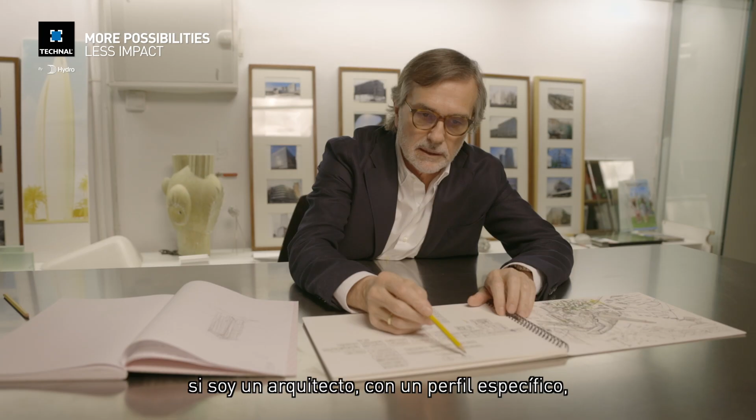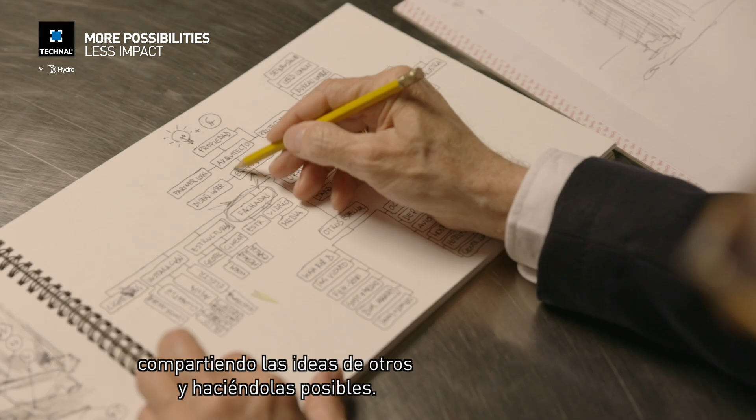I'm an architect, but with a special profile, because my team and I have developed more than 180 buildings over the last 30 years, making possible the ideas from others, sharing them by teaching in different universities, and especially through drawing. We have a small and very dynamic office based in Barcelona, from where we offer facade consultancy for the best architects around the world, including Pritzker Prize winners.

Usually architects imagine the result and engineers create the process—architects think what, and engineers know how. So we, as facade consultants, move in an equidistant position between both, and our projects are developed with a simple philosophy: technique and form are the same.

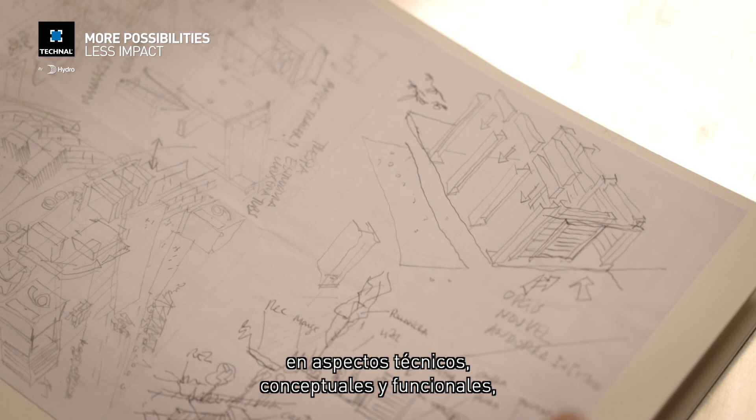Every day, more architecture studios focus their work on the level of definition of the facade, the technical aspect, and the conceptual and functional development, leaving the detailing and specific elements of the facade to be delegated to technical specialists from the industry. So the most common way to face this technology problem is to claim the support of brands that help us develop the most ambitious projects.

Our role as consultant, in addition to the above, is to think and advise from the strategic development.

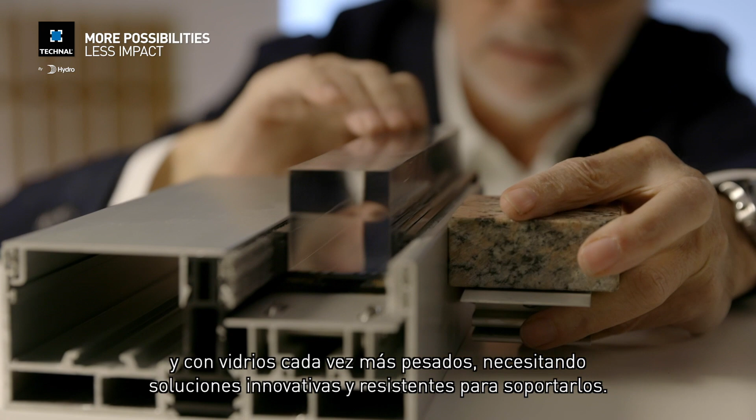The present leads us to consider energy as one of the engines of evolution, and this has been the case for decades. However, this contrasts with the need to work with large formats and glazed surfaces that push the window-wall ratio up, where the energy performance of the facade is in contradiction with the dimension of the transparent areas of the buildings. On the other hand, this need to increase sizes requires larger panel dimensions, engineered for bigger and heavier glass panels, through innovative connections and reinforced glazing support.

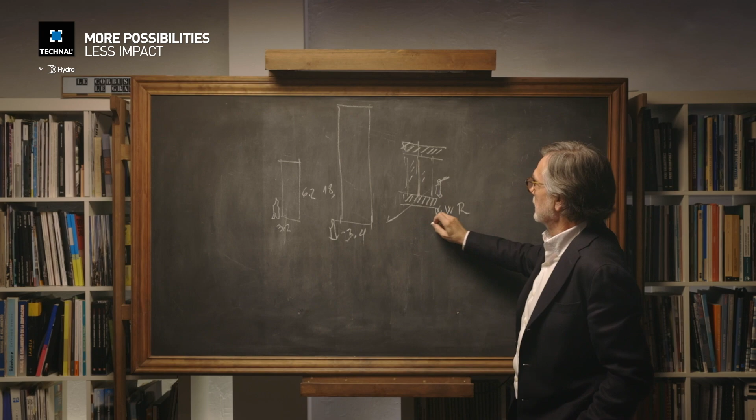Last year, we started with jumbo glass of 3.2 by 6.2 meters. Now, with different suppliers, we have glasses up to 18 meters in height by 3.4 meters. So, obviously, we can use these sizes of glass. The trend of buildings around the world is to increase the glass surface, but balanced with the window-wall ratio.

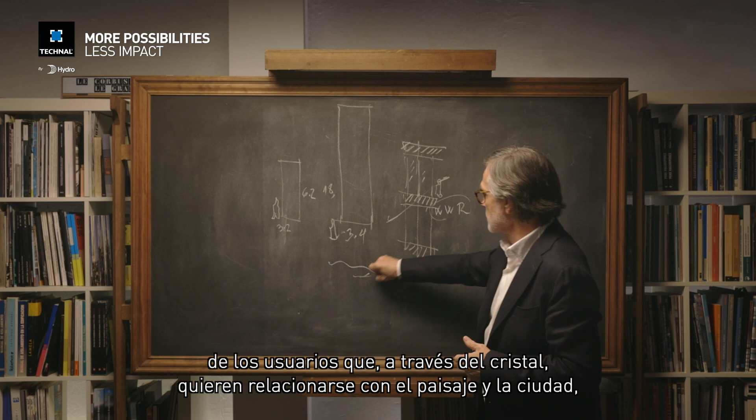Because we need to balance the comfort of users contacting directly, across the glass, with the landscape, the sea, the rest of the city, in order to respect the rules and regulations in terms of energy savings.

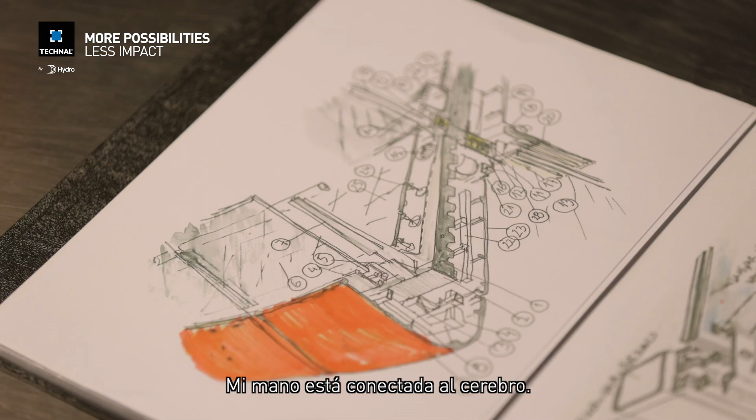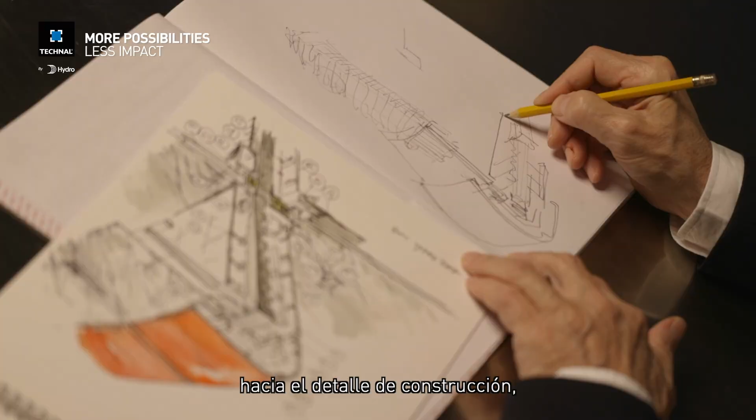The only way that I can explain my experience, my thought, my feeling about the technical decisions and technical elements, is drawing. My brain is connected with my hand directly. When we are creating, we have to pass from the concept and schematic design development to construction documents, trying to be proactive with the architects—usually our clients—in order to achieve maximal fidelity to the original idea.

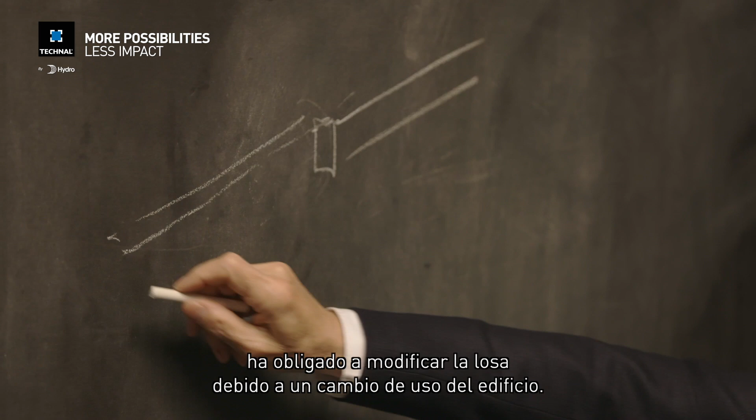For example, a building under construction in Barcelona, named Diagonal Zero. It's a multi-story building, I think 27 levels, with a special balcony. This is the original slab, because it's a huge modification of the building. This is the slab, and this is the beam that we have to support.

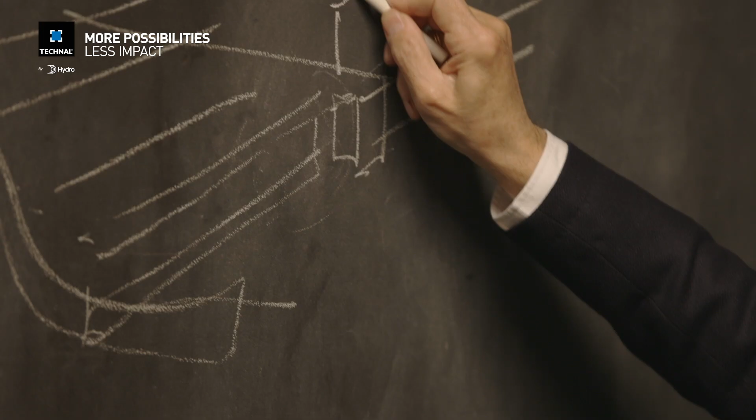This is the level of the interior floor, this is the exterior floor, and we have a shape like this. This is a balcony, this is a terrace. The building is something like this—more or less 110 meters—and all these balconies are here.

And here, in the lateral facade, we have a typical curtain wall—a profile typical with spandrel and glass and windows, etc. The pass from here to here is very important to understand what happened: what is the slab, what is the structure, what is the weather line.

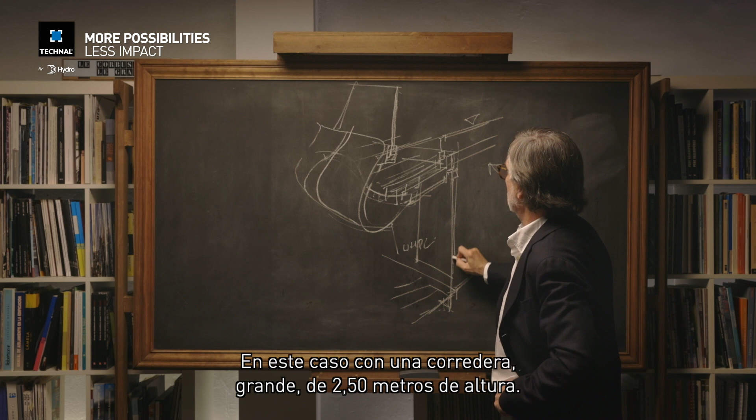In this case, with a sliding corridor, a sliding window, a huge—maybe 2.50 meters in height—and this is a part. We'd like to show this in color, but I think it's clear in order to understand what happens when we have to develop from the concept to the detail.

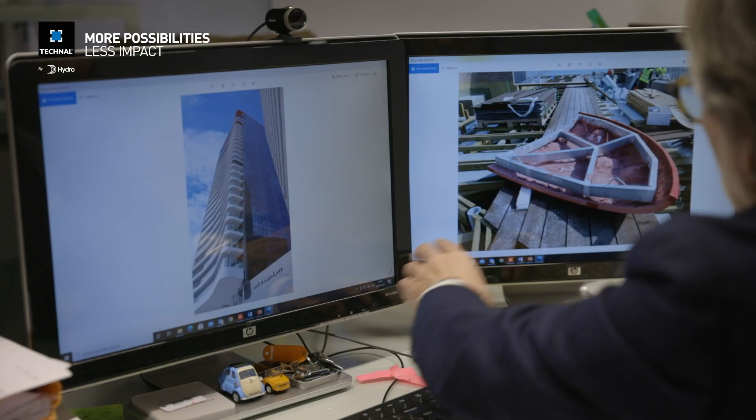The second case I would like to share with you is a commercial and residential building in Ibiza, named Isla Blanca. The author is l'agence Moatti-Rivière de Paris. The project is led by Alain Moatti, and the local partner is Josep Ferrer Llaneras.

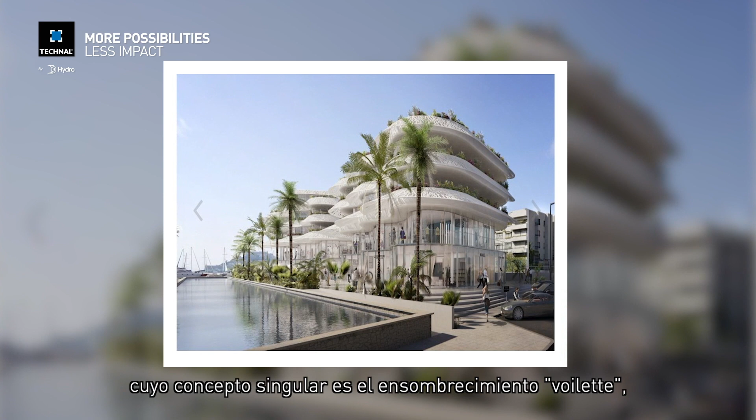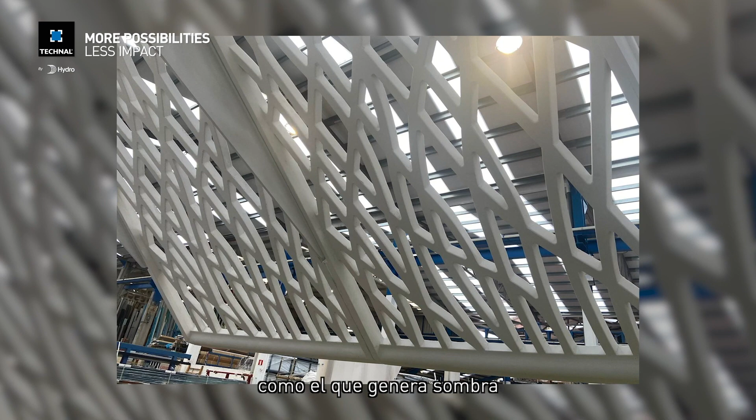The main concept is a shadow device named 'voilette' in French—an element 'qui vole.' The building is doubled like this, maybe 80 meters in length from here to here, using this kind of material like a hat that produces shadow, like the shade on the face of a woman on the beach. This element is something like this.

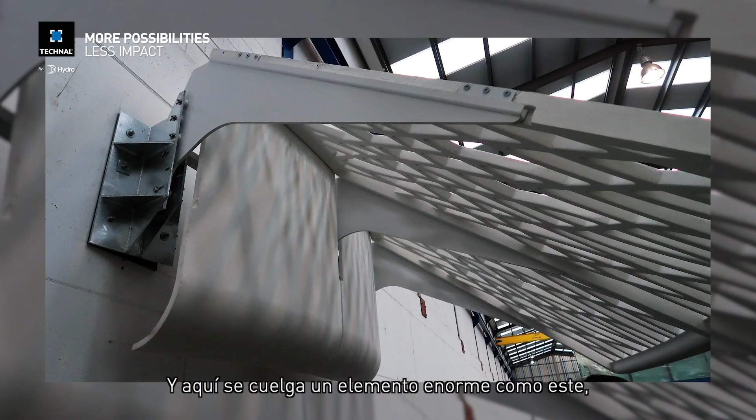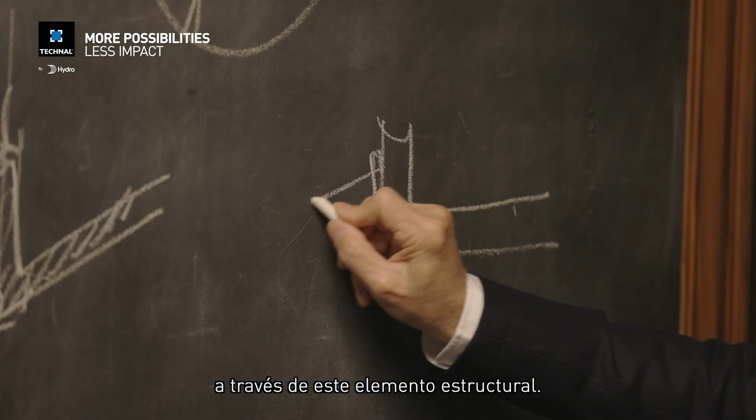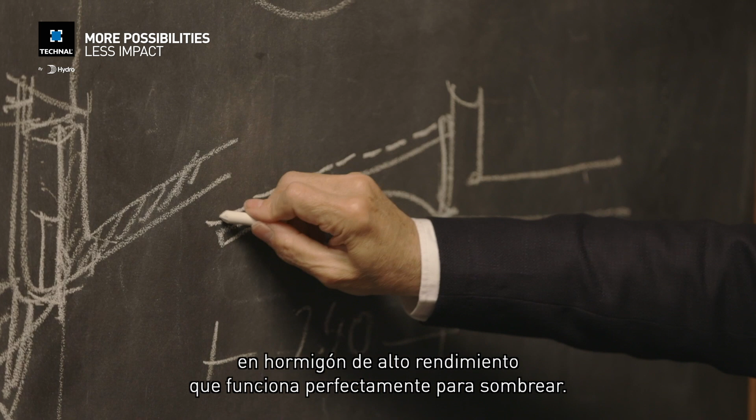There are different molds because this is the main structure of the building, and here is hung a huge element that supports these curves. So we have the structural element. This is a cantilever, more than 2.40, and this is the voilette in ultra high performance concrete that allows it to work perfectly like a shadow device.

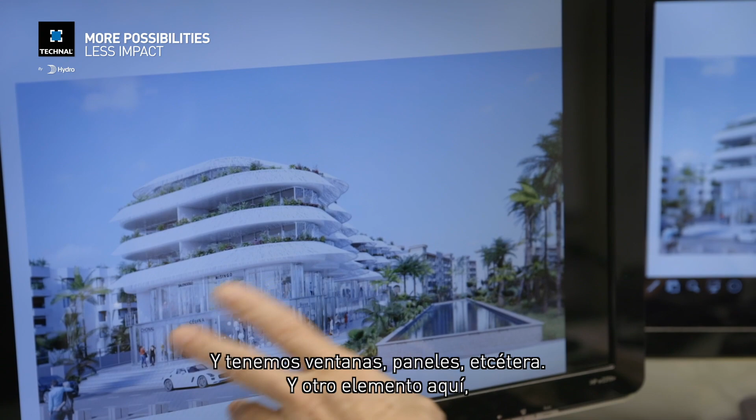So we have the vegetal elements here, and we have the windows, panels, etc. So from here, we have as well another element here that is characteristic of this building.

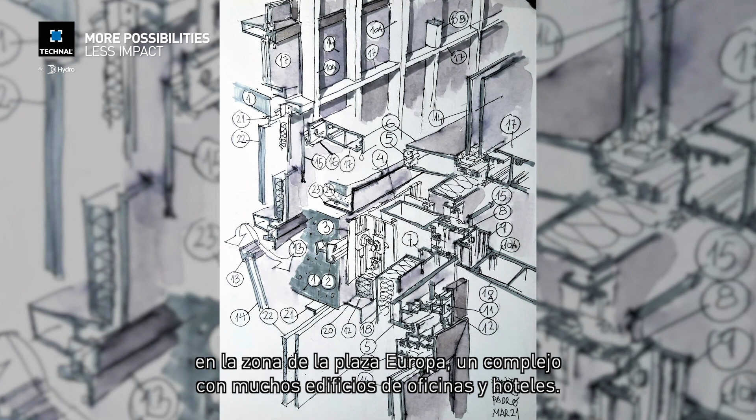The third case study is a multi-story hotel in l'Hospitalet, near Barcelona, in the Plaza Europa zone. It's a huge complex with a lot of buildings, hotels, office buildings, etc. This case is a project of Alonso y Balaguer.

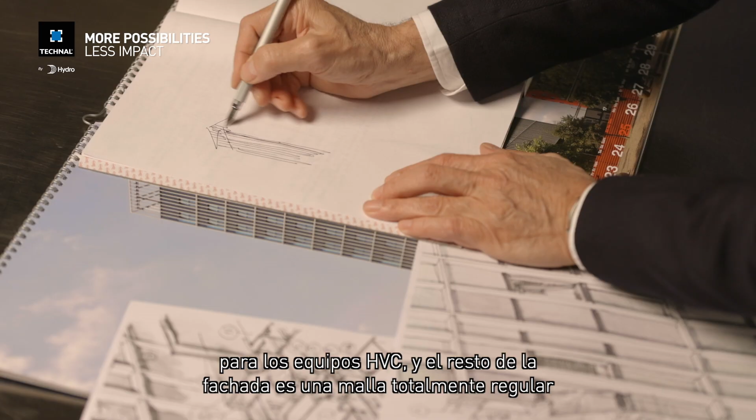It's the most common and typical curtain wall facade. The building is a parallelogram like this, with a typical zone with machines and the HVAC equipment, etc. And the rest of the facade is a grid, absolutely regular, with the profiles that I will explain, because in terms of technology it's very simple, but the effect is really very interesting.

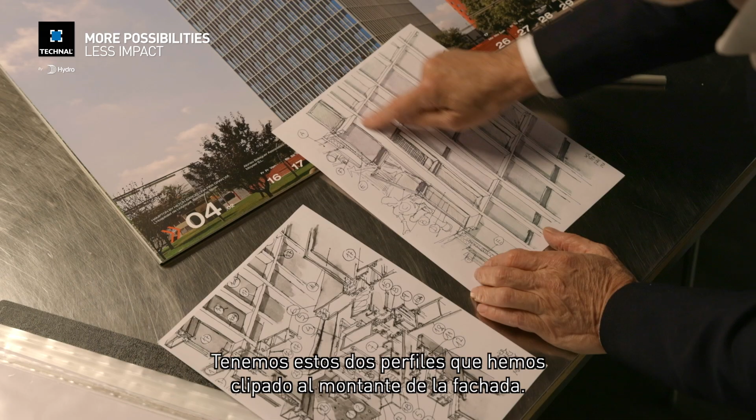So we have these two profiles, and they are clipped to the main mullion of the facade.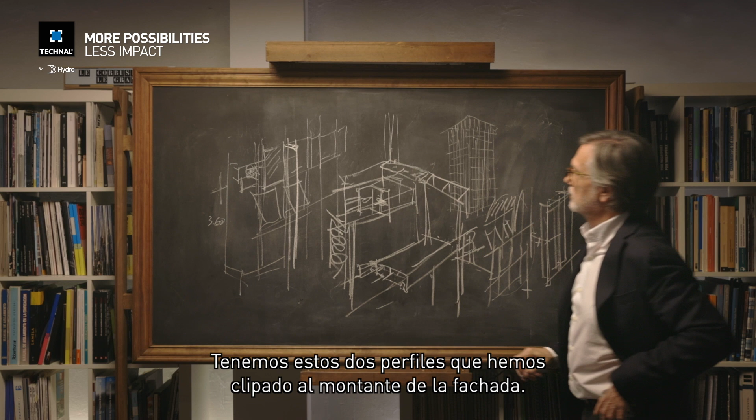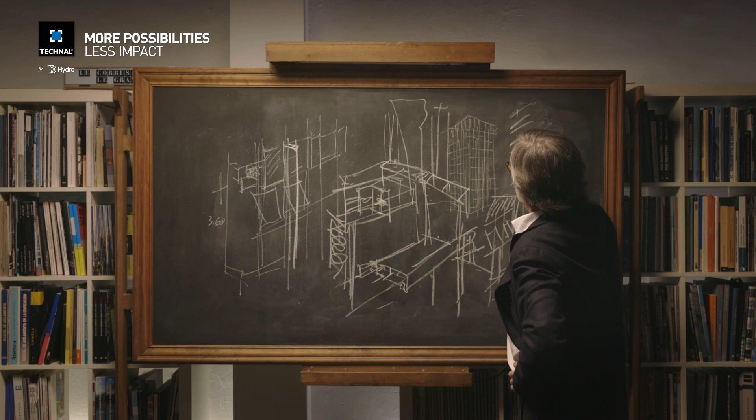And that's it. So we have here the Toyo Ito building, the Nouvel building, RCR here as well, Moneo, and well, it is a very interesting complex that I invite you to visit, because if you are a passionate architect, I think that could be a good option to spend one day in order to know directly all this kind of different architecture.

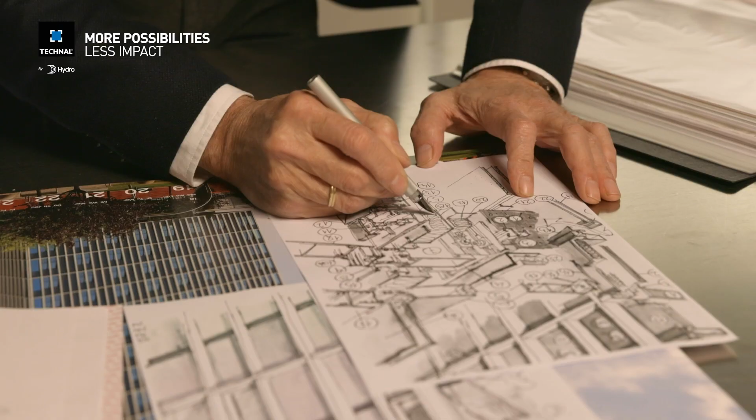As a conclusion, I would like to share with you five thoughts as a summary. First of all, evolution that improves considering aspects from different points of view, like industry, architects, investors, owners, and consultants like us.

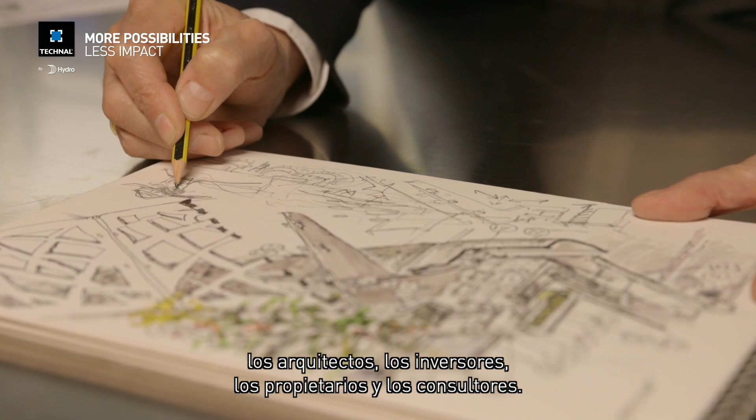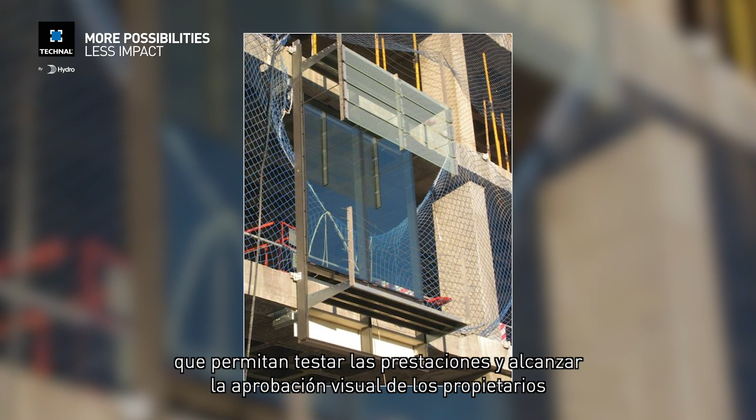Second, the extreme conditions of use are solved by anticipating the problems and building samples, performance and visual mock-ups that are tested by the owners in order to approve the final solution, to check the transparency, the vibration, all the aspects that we have to control by using prototypes and mock-ups in real size.

Third, we have to look for collaboration with international brands that belong to a big and well-known group. This is the best option to guarantee a long experience of success.

The fourth topic that I think is important to sum up this small explanation is to involve the clients and users in the project: planning, commissioning, exploitation, maintenance, live and recycling building as a way of working, because we have to change our attitude about the design and use of the buildings.

And finally, we have to work from a global perspective, which makes it essential to combine the most diverse languages, cultures, rules and regulations, economic and social criteria with the most attractive architectural proposals. And for us, it's a privilege to be able to create a space for a better future.

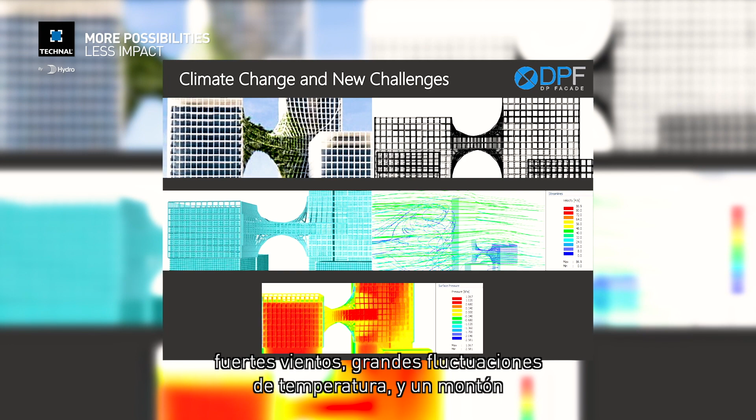This is really one aspect I wanted to touch on briefly now, which is what's happening with climate change. With climate change, what we're having now is more extreme weather, greater winds, greater temperature fluctuations, a whole bunch of additional considerations that make designing facades much more complicated and that require much greater care from the facade consultant who's handling the facade.

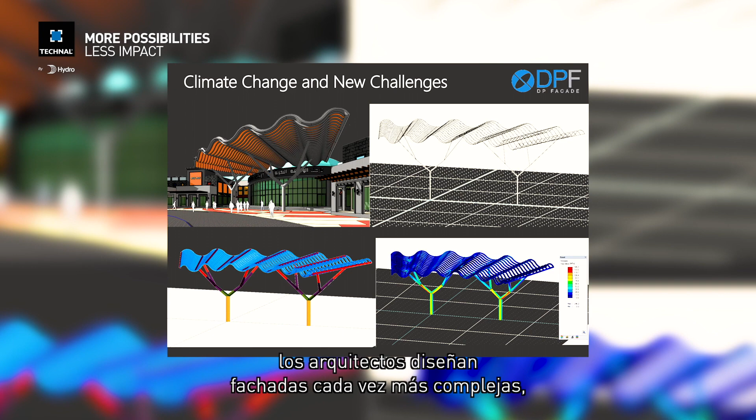On top of that, to make matters worse in a way, or maybe to make matters more interesting, that's how I'd like to think about it, architects are designing facades that are increasingly complex. It's almost like a competition, who's going to get the ideas that outweigh or outdo the predecessor, so to speak. And we get complex geometries, various aspects in the design of facades that really challenge us to bring our best when we work on this project.

To do this, we've had to develop or acquire a bunch of new tools that we did not traditionally use. When I started as a young facade engineer, I used to do everything by hand, whether it's the sketches, whether it's the calculations, everything was done by hand. And today we are using technologies such as BIM, such as parametric design, using dedicated engineering software.

We make use of 3D rapid prototyping to test ideas, to see, does it even make sense? Is it buildable? We've even developed tools that are not on the market, something we call IVMU, which is an interactive visual mock-up, which allows the designers, the engineers, the architects, the owners, the building developers, to use virtual reality goggles to visualize in real time what their buildings and facades are going to look like, and to make changes in real time.

This is really a fantastic tool that we've developed over the past couple of years, and that really changes our approach to designing facades on these, especially on these complicated buildings with multiple materials, complex geometries.

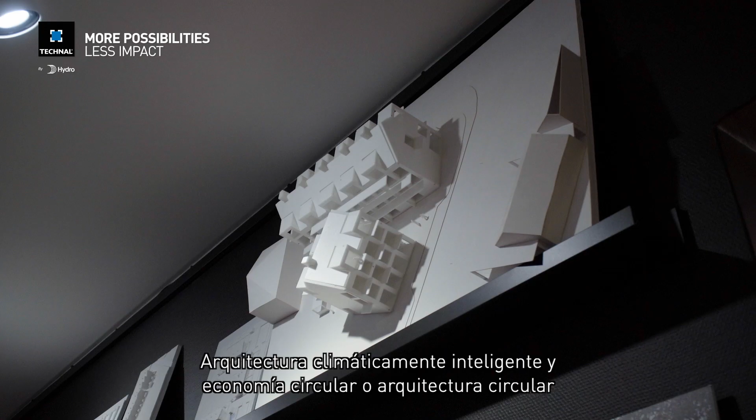The six focus areas are carbon emission, which we also talk about as climate smart architecture. The next one is circular economy or circular architecture. And then we work focused with biodiversity. On the social sustainability side, we work with safe environments, health and well-being, and placemaking.

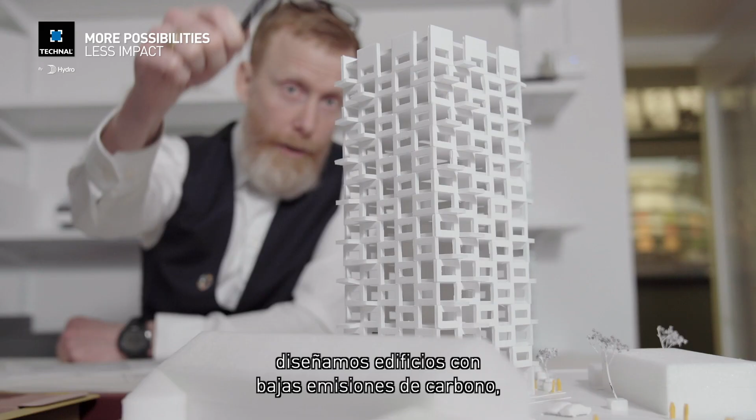So if we start with climate smart architecture, or carbon emission as focus, we work very much on designing buildings with a low carbon emission or carbon footprint. And that is both from operations, when it comes to energy efficiency, but also when it comes to embodied carbon, which means the carbon that is emitted when producing the materials that go into a building.

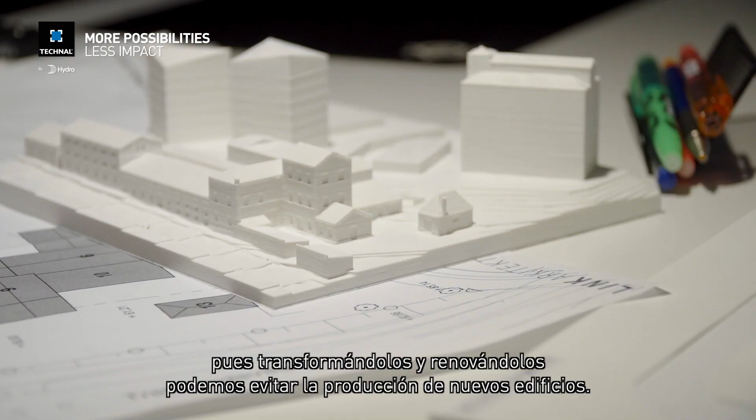If we then talk about circular economy and circular architecture, it's very much about designing resource efficient, securing that we don't use resources unnecessarily, but also about taking care of the buildings that are already built, so transforming or renovating buildings before we start looking at producing new buildings. It's also about reuse and recycling of materials, and also designing for circularity, preparing our buildings for a future that is more circular than it is today.

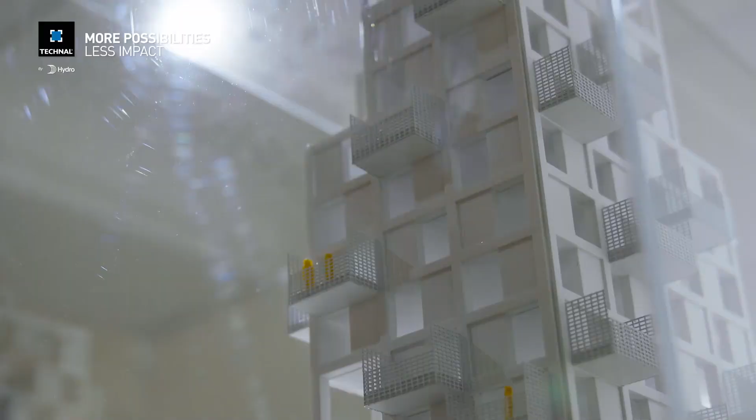And then we can talk a little bit about biodiversity. We know that the built environment, producing materials and constructing buildings, has a great negative impact on biodiversity. So when working with the built environment, it's really important to look at biodiversity and see how, when we construct our buildings, we can choose materials that have a low impact on biodiversity, and also work with biodiversity when we create the built environments within cities.

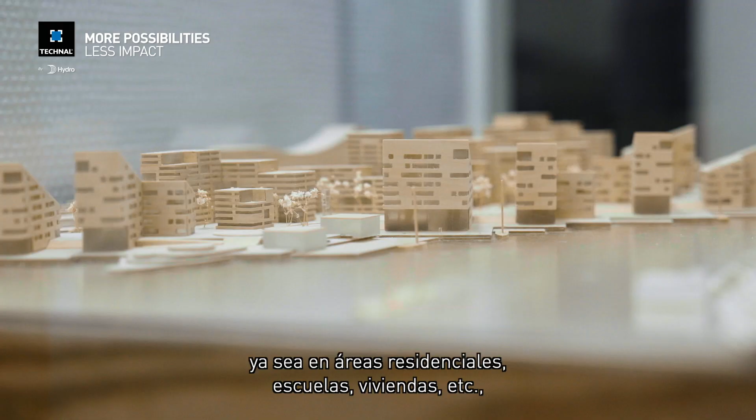If we then talk a little bit about the social sustainability that we work with, one of the areas is safe environments. We know that creating safety within, for example, residential areas, schools, housing, etc., creates people that feel safe and can take in, for example in schools, their education better. Not being safe at school can make students not come to school. So safety is a very important part of our contribution to social sustainability.

And then we can talk a little about health and well-being. That is an important part if you work with offices, hospitals, schools, also residential areas. If you can support a living that is healthy and supports well-being, then you can solve or contribute positively to some societal challenges. We know stress is an area, at least in the Western world, that is problematic, and we know about different heart diseases and so on.

And then the last one is about placemaking, and that is both about safe environment but also about interesting environment, places where you want to stay, places where diverse people can come and meet, and you can feel the inclusiveness because you want to stay there, you want to meet other people.

When it comes to the architect's role in relation to sustainability and sustainable development, we play an important role because we usually get in pretty early in the processes and the project development, and thereby we can be part of setting a vision that fully integrates sustainability so that it can be a base for decisions made during the design and also during the construction phase.

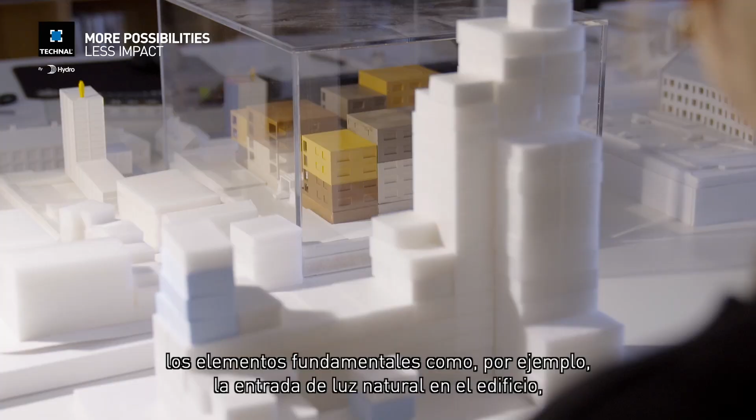And then we also play a very important role when it comes to the actual design. So through the design we can work with, for example, indoor environment when it comes to designing so that daylight comes into the building, that you have a good view of the scenery, and also working with designing so that we minimize the negative impact of the built environment in relation to resource usage or carbon emission and stuff like that.

And then when we come to looking at choices that we make, for example, in relation to materials, we have a great possibility to influence the final positive impact in relation to sustainability by choosing materials that we know can lower, for example, the carbon emission, the carbon footprint of the building, or adding to some qualities in relation to indoor environment.

Well, if we talk about materials, we know that the construction industry and producing materials have a great negative impact on the environment. It's everything from polluting the air and the water. It's about using virgin resources that are rare or scarce or limited. So we have to make sure that we don't use them too much, because then we'll run out of them.

It's also about, we know, for example, that 80% of all drinking water goes into producing different materials. We know that 80% of the loss of biodiversity is coming from producing materials, foods, etc.

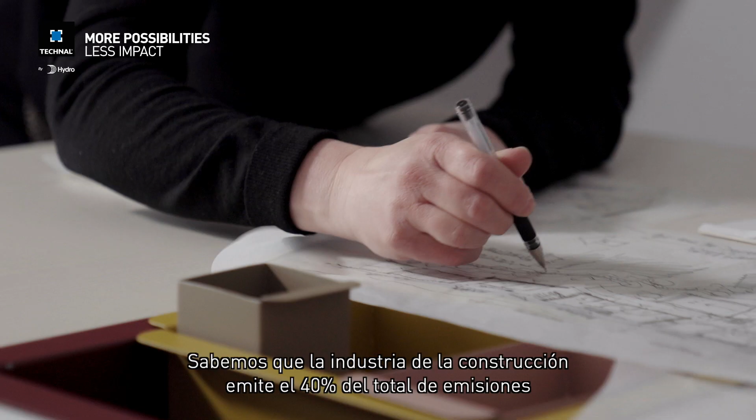We know that the construction industry is emitting some 40% of all carbon emissions. And we also know that the built environment has a big impact on water and biodiversity. And all this together makes it really important to work holistically in relation to sustainable development.

And talking about carbon emission, it's really important that we not only look at the operation, because if we look at carbon emissions, we have one-third that comes from embodied carbon and two-thirds that comes from operation. But we also know that carbon emission from embodied carbon is carbon that is emitted day one.

And we're quite in a hurry to turn the trend in relation to carbon emissions. So therefore, we have to have some 40% lower carbon emission in relation to embodied carbon at 2030 to be able to reach the 1.5 degree target that is defined by the Paris Agreement.

So a building that is not addressing embodied carbon, I would say, is not a sustainable building at the moment. Then it comes very natural that the one that has the lowest carbon emission is the best one to choose from a sustainability perspective. So then you can compare one with another and go for the one that has the lowest carbon footprint.